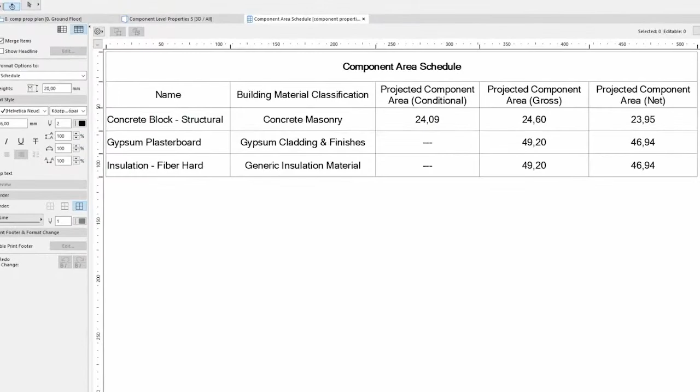Stay tuned throughout the evening to know more about some continuous development that Archicad is following for the last 35 years to answer your needs. Now let's kick into the Power Pack session, but before that, we would like to thank all our guests who have joined us live today.

Throughout this evening, you are going to witness some interesting conversation about how technology and transition can help you for improved productivity and profitability, with clear communication and collaboration within your team and external stakeholders.

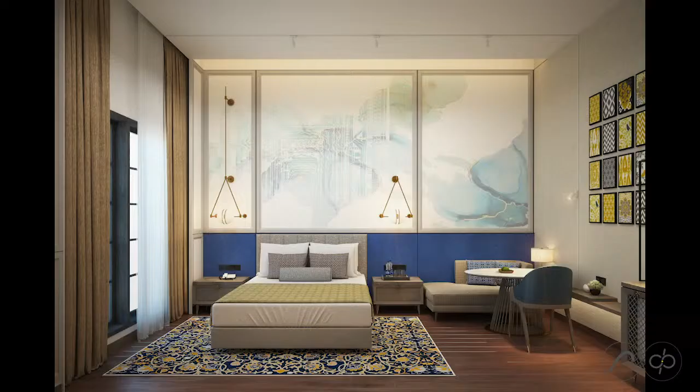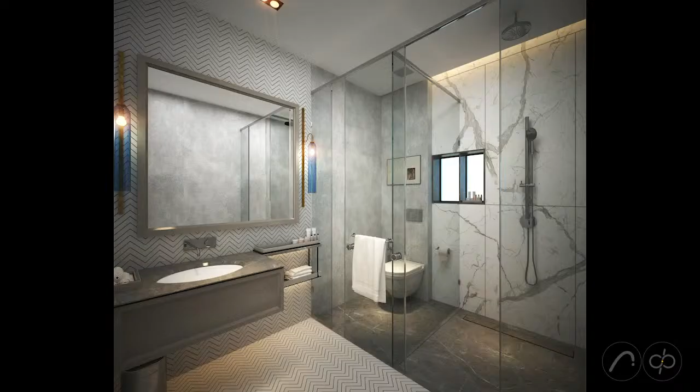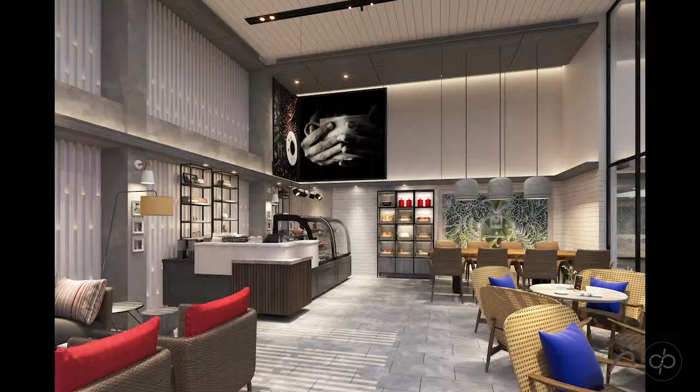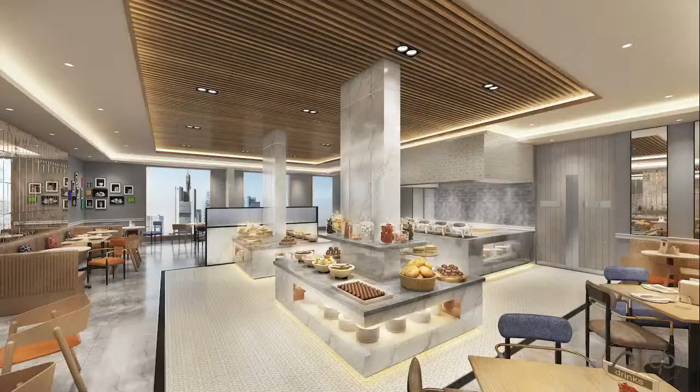With this, let me invite our first guest for the evening today, Architect Khozema Chittalwala. He is Principal Architect and Founder of Designers Group. Architect Khozema Chittalwala is a renowned professional within the architecture and interior design industry in India. A leader and entrepreneur with over 30 years of experience, Architect Khozema is at the forefront of hospitality design in India, having his design studio Designers Group located in Mumbai. Leading a pack of talented architects and interior designers at the firm, Architect Khozema is recognized for his striking vision, innovative solutions, and experiential design, living up to his philosophy of comfortable yet stylish. I would like to welcome Architect Khozema Chittalwala.

Thank you, sir, for joining us for BIM Meets, and let's start the conversation, which is going to be really power packed, like your personality. So Khozema sir, tell us, you being into hospitality interiors, how has switching to Archicad benefited your practice?

Shivang, the point is that design is becoming more and more complex. The thought process and imagination is something we used to sketch out, and that too not with the precision that we have today. That is what we used to use to evolve our design and create our designs. But today, with the complexity which is growing in design, we have a tool by means of which we can actually visualize our design and how it is shaping. This is something which is giving us a benefit that we can adapt, we can change, we can improvise our designs as we keep on progressing. This is a fantastic tool which will help us in creating better and refined designs from day one.

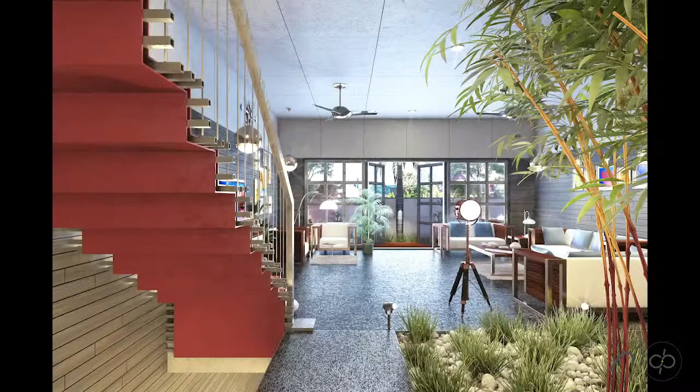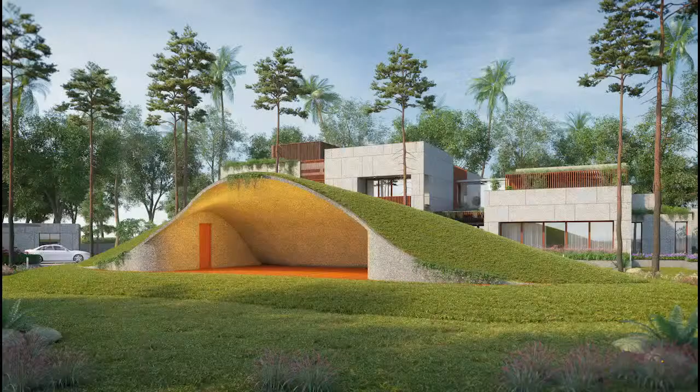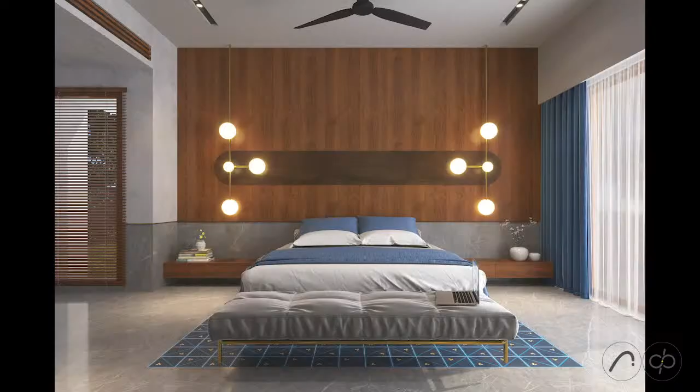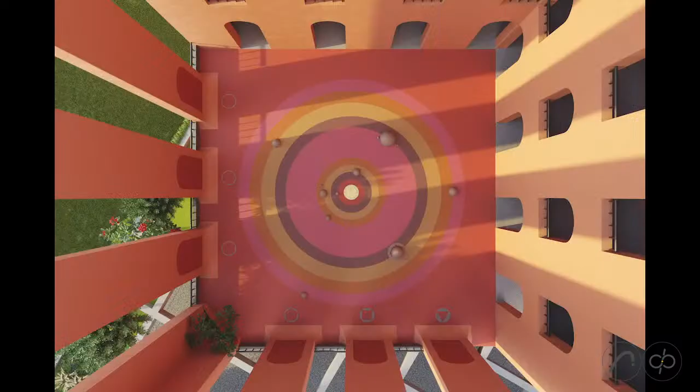Malay is a partner at Studio Saransh, Ahmedabad. Being the son of two architects, Malay has grown up to admire good design. The need for a well-scripted overall experience of space has become quintessential to his notion of existence. His journey through academics in architecture at CEPT University made him very conscious about the treatment of materials and their impact on people. At the same time, brief spells at Zurich and Madrid made him understand how the use of those materials could dictate form and its details. Design to him is not just one thing or another, but a swirl of constantly changing combinations of many. A lot of these changes come from his need to explore and read new things, which then circles back to contrasting ideas for different projects. In his mind, a design practice is less about the success of a particular project, but more about developing a consistent but exploratory body of work. Currently a partner at Saransh, he is using these experiences to formulate a fresh direction for this 27-year-old practice.

Thank you, Malay, for joining us. Let's dive in. The world is moving very fast in terms of digital adoption or technology adoption. What is your take in terms of technology benefits with Archicad for your organization?

I think it's great to see a completely new method of documentation, because for years, at least in India, it has been very focused on drafting, whether manual or on computers. This sort of just lets us design, because there is technology doing that for you. And I think what that allows us is to focus on what we are best at, which is actually coming up with new answers to relevant questions, and it helps us create more time to resolve things better rather than just continuously communicate what we have resolved.

That was really interesting insight to know about. Moving on, my next question for you is, how do you think Archicad has made your team more productive? How is it helping your team to be more productive, more fast in terms of workflows?

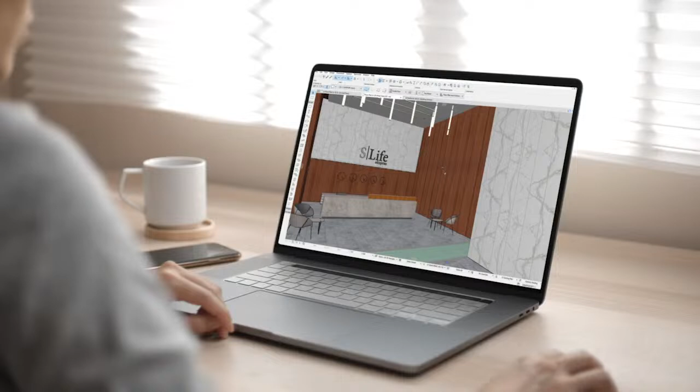When architects work on complex BIM projects, it's essential that they can instantly find, identify, select, and zoom into any building element across all views to select the element they need.

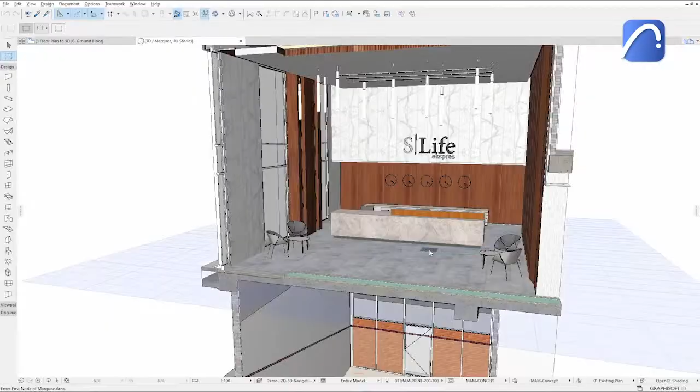Use Archicad's multiple features and commands to easily find and select elements. Show selection or marquee in 3D. Show all in 3D. Find and select.

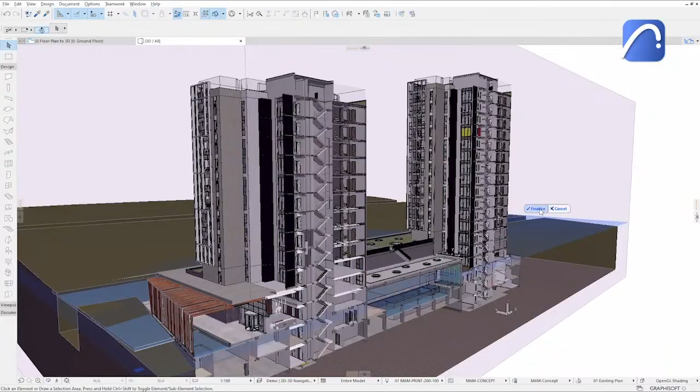Filter and cut elements in 3D with 3D cutaway. Keep track of selected elements when switching between 2D and 3D views without having to reselect them, thanks to new and improved commands. In this example, we'll check the selected opening in 3D. Right-click on it and activate the Select in 3D command. The 3D window keeps the element selected.

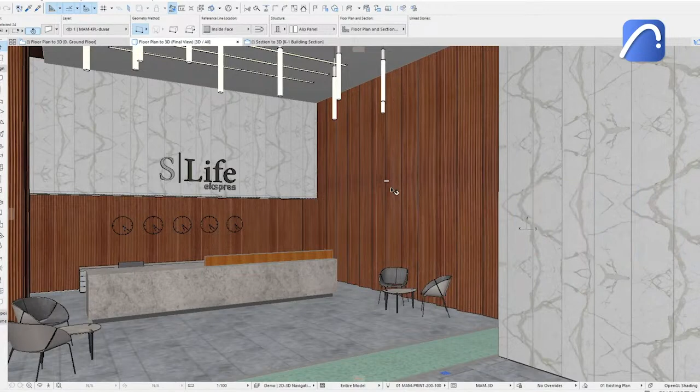Control element visibility and speed up your workflow when working with overlapping elements in 3D by hiding selected elements. This will make other items more visible without hiding their layers or modifying layer combinations. Simply right-click on the element you want to hide and choose the Hide Selection command.

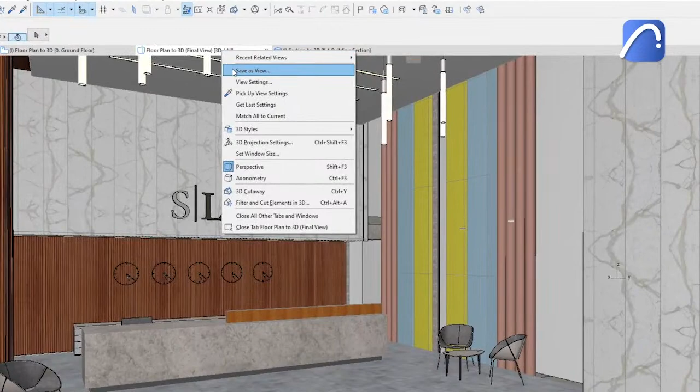Save this custom view for later if you want. Now let's select a pipe and use the Select on Floor Plan command. The floor plan window instantly shows a close-up of the selected element in its environment. Use the Show All command to unhide the hidden elements and return to the original 3D view.

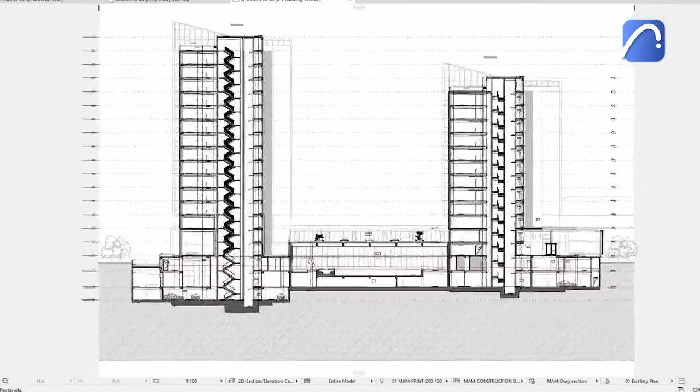Use this functionality in sections, elevations, and interior elevations as well. Track selected elements in any view, 3D or floor plan. Save time and navigate more easily between views, and use multiple, flexible options to control element visibility.

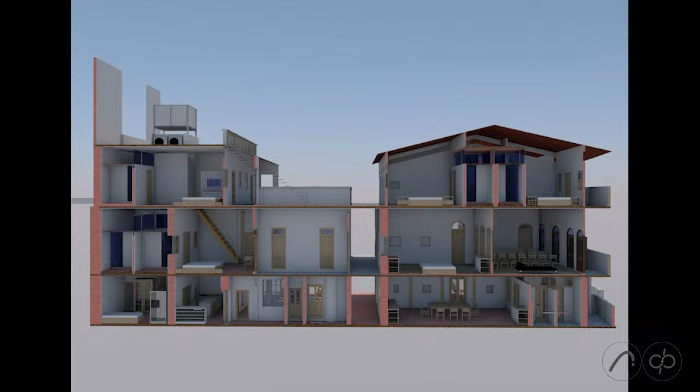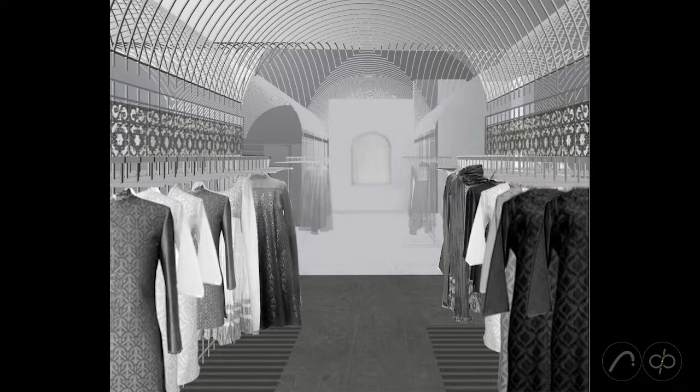She has worked on the Petronas Towers designed by Cesar Pelli in Malaysia for a brief internship before leaving for the University of Michigan for a master's program. She was awarded the Masters of Architecture in the year 1999. She is also managing trustee of Das Foundation, an NGO that runs Sathi Night School for underprivileged children in Sector 21, Gandhinagar.

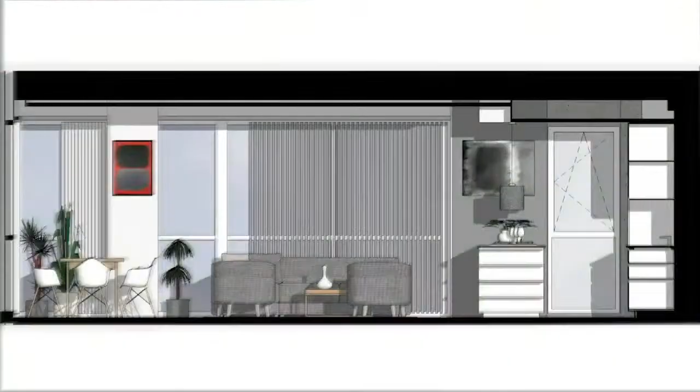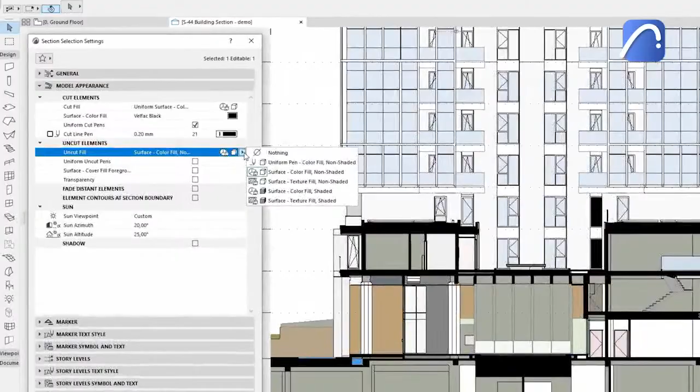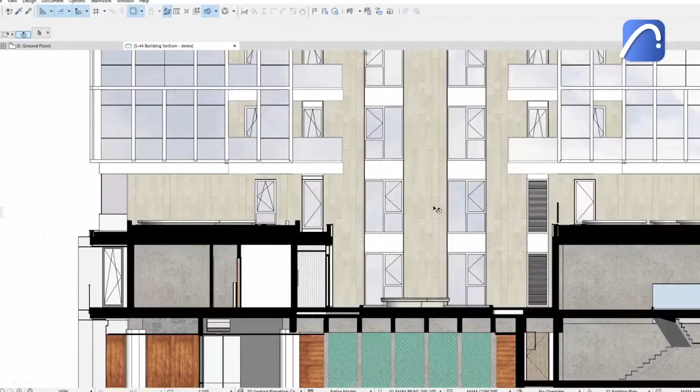Create stunning professional design presentations without workarounds thanks to Archicad's powerful out-of-the-box presentation tools. Apply the same high-resolution surface textures on 2D views that you already use in 3D. In this example, the surfaces are represented with the Surface Color Fill option. Let's see how we can make this view more appealing by using the enhanced settings under the Model Appearance section. Apply the non-shaded surface Texture Fill option. In addition to the stone cladding, wooden, concrete, and other surfaces, the glazed curtain wall is also worth experimenting with. It applies a texture with an image of the cloudy sky.

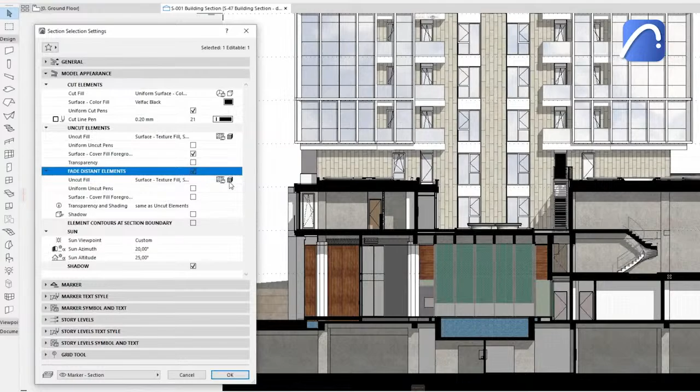Apply soft shading and vectoral cover fills on top of the textures to create spectacular sections and elevations. Create a sense of depth by fading distant parts of the building. Draw attention to what's important in the foreground by checking the Fade Distant Elements checkbox. Select the Shaded Texture Fill option and turn on the shadows. For an even more restrained view of the background elements, display the distant elements with no textures and shadows, but with their contours only.

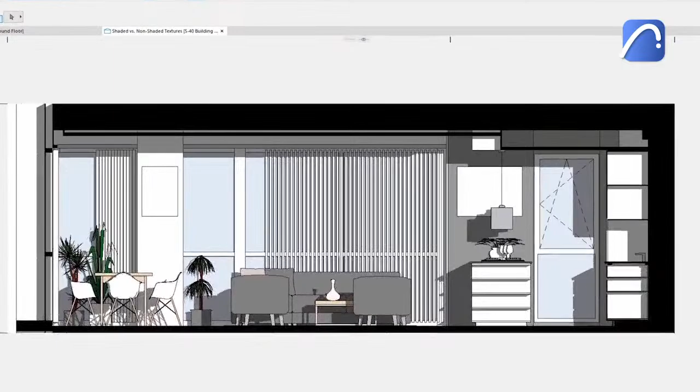Create vivid interior elevations with realistic details using the same presentation tools. Customize the direction of the sunlight to apply the most appropriate shadows.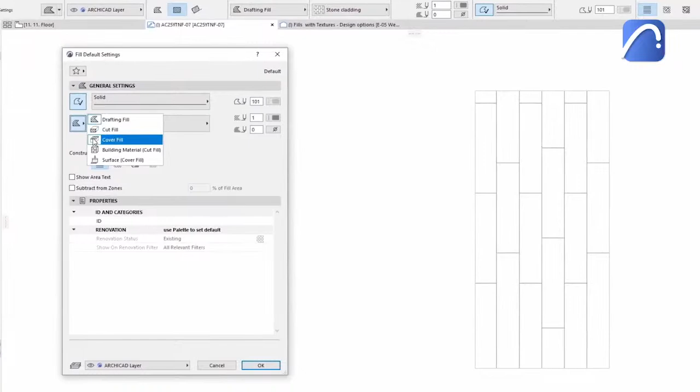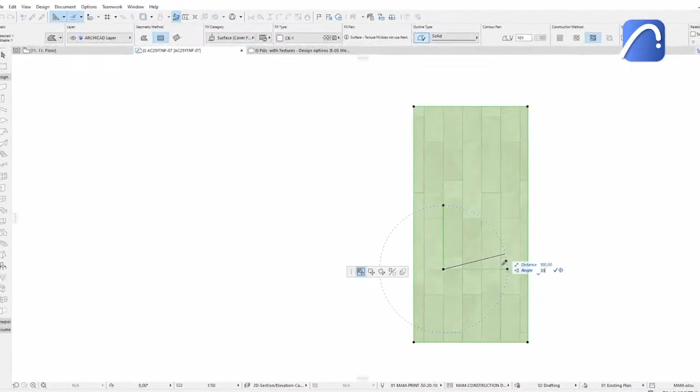Use surface-based fills to heighten the look of your design documentation. Access and apply surface textures using fills. Choose the surface type fill and select one of the 3 surface-related display options: color, cover, or texture fill. Modify the alignment of the pattern as you would with any other fill. Use the surface type fills to experiment with and present multiple design options in various sections, elevations, and floor plans without changing the elements themselves.

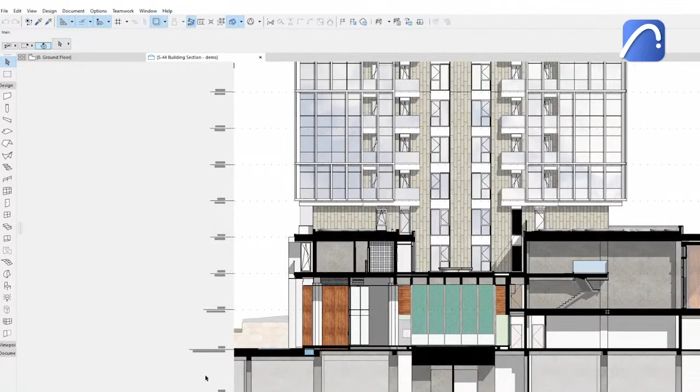Create high-impact design documentation with Archicad's powerful out-of-the-box presentation tools. To learn more about Archicad, visit graphisoft.com.

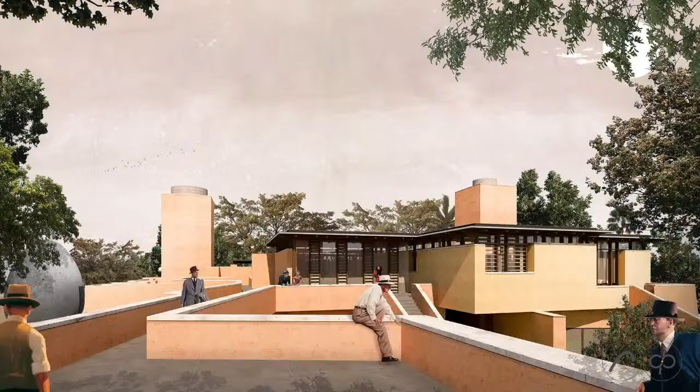My first question for you is, when did you start using Archicad, and what do you feel the industry stands at today in terms of technology adoption? The core team is pretty used to it now, including me as one of the partners, and drafting partners who use the software themselves. Of course, Doshi doesn't use that, so he's happy if he sees something in 3D.

But the potential of what really comes out of that, I'm the one who is interested in those things. So when we get fresh grad architects, or architects with experience from somewhere else who haven't used BIM, it's a little challenging to make them understand the real importance of how you make a model with layer combinations and the whole thing, because the better your model, the better your output.

So the modeling discipline is sometimes challenging. We try with templates and favorites as much as possible, but one has to keep a tight rein so that not everyone is cooking their own modeling soup. You get a proper output from the model you want, and you don't need to solve minor problems locally. If you had a proper template in the beginning with proper fabric, any idiot can make a proper Archicad model, I think. If you've set it up from the beginning and put it together, it's really not rocket science.